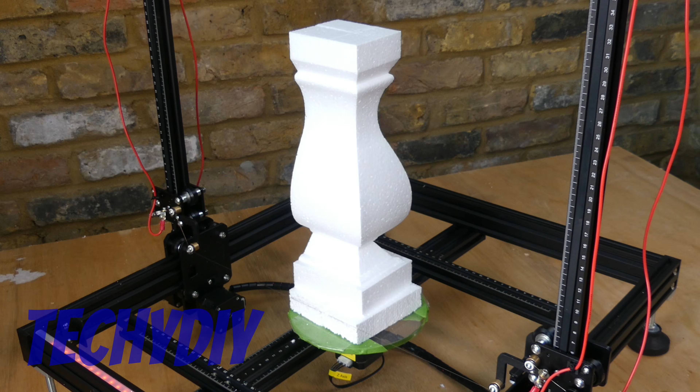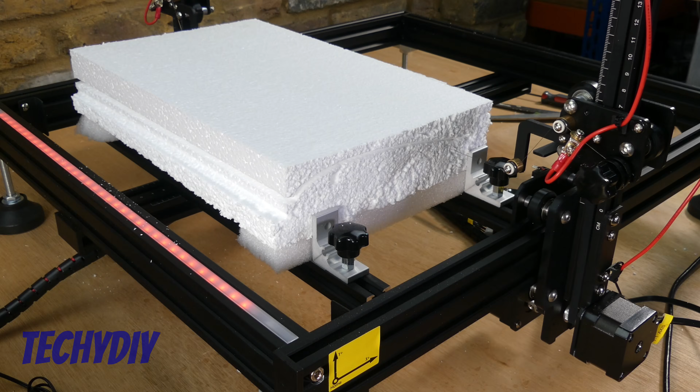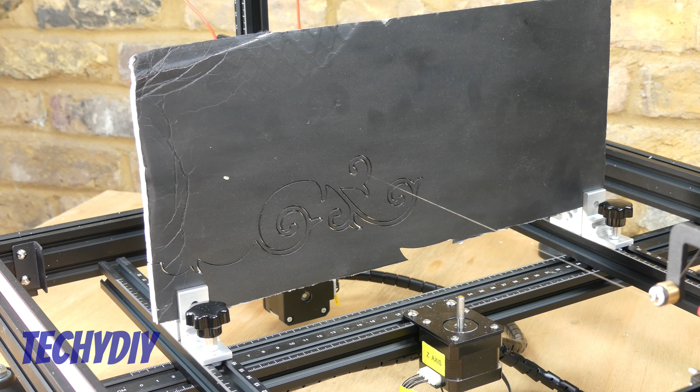In today's video I'm going to look at the FoxAlien HW40 hot wire foam cutting CNC machine. This uses a 0.25mm diameter nichrome wire to melt a path through the foam, heated by connecting it to a power supply. This is a GRBL based machine with 2 axes and a third rotary axis. It can cut different types of foam by setting the wire voltage and the axis speed.

This is what comes in the box. It's fairly easy to assemble, with full instructions provided in the user manual. First, the base profiles are screwed together.

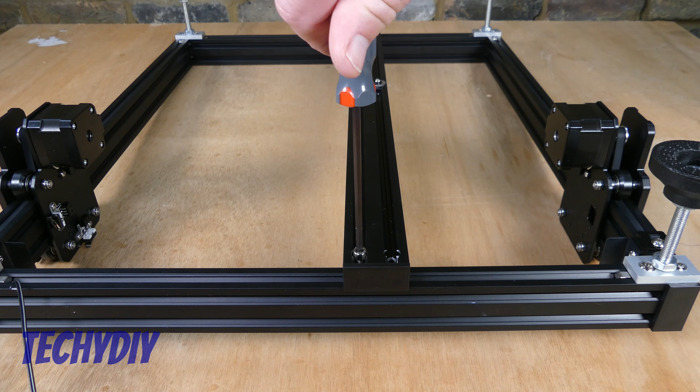The feet are screwed into the base frame. The rotary axis profile is attached to the base. Clamps are slid into the clamp profiles, and the clamp profiles are attached to the rotary axis profile. Next, the gantry sides are attached, followed by the gantry top.

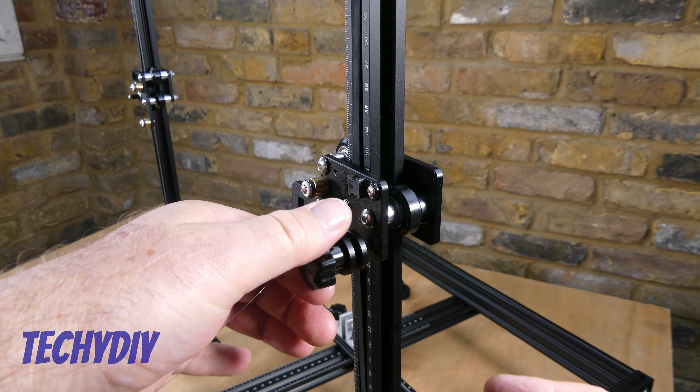Next, the nichrome wire is installed. The knob is used to tension the wire and expand the spring. The purpose of the spring is to compensate for the wire lengthening as it heats up.

Finally, the wiring loom is installed. The connectors are labelled for easy identification.

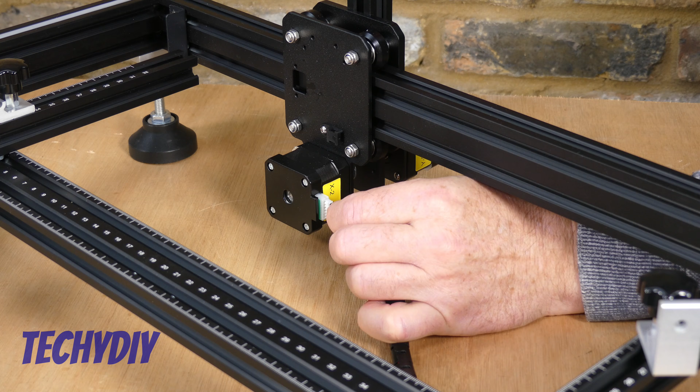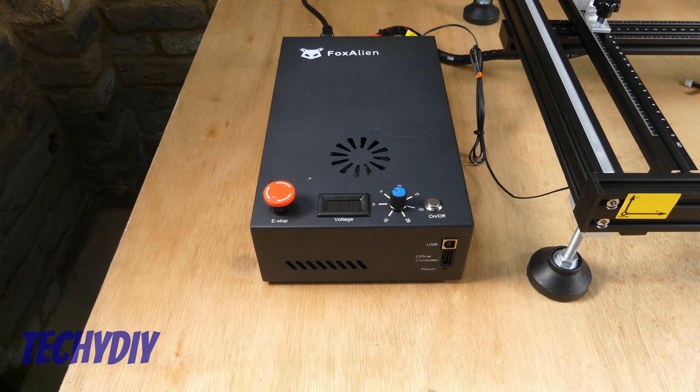Now the power lead is plugged in and the USB cable. Check that the emergency stop switch is released. The mains power is turned on, and then the switch is pressed to turn on the hot wire. Adjust the voltage to set the temperature.

Next, we're going to look at the software, but before we do that, a quick message from today's video sponsor.

The software, PDF and example files are provided on a USB memory stick. The USB COM port driver should be automatically installed by Windows. Inkscape is used to design and create G-code files, and UGS, or Universal G-code Sender, is used to send the G-code files to the machine. Both of these are free and can be downloaded directly from their respective websites.

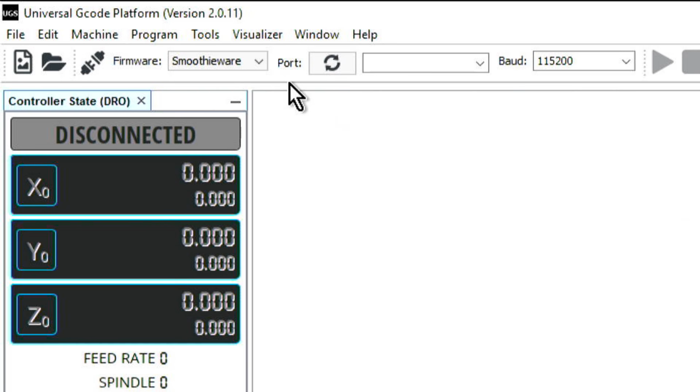UGS is copied onto the computer hard drive, and the UGS platform.exe or 64 file is run from the bin directory. Once it's loaded, the firmware is set to GRBL, the correct COM port selected, and the connect button pressed.

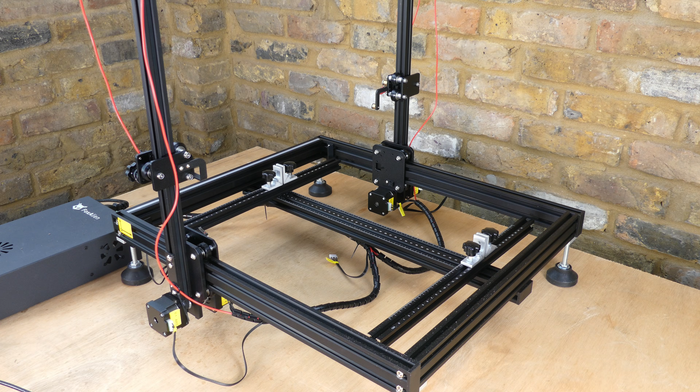The home machine button is selected, and if all is well, this should initiate the homing cycle to find the machine's 0 position. The user manual gives some good instructions about how to use Inkscape to create designs and turn them into G-code.

I'll quickly run through an example of importing an image. Shift-Control-D opens the Document Properties menu, where we can set the width and height to 400mm. Then in Edit, Preferences, Interface, uncheck Origin at upper left with Y-axis pointing down. Control-I to import an image.

Click the padlock to lock the aspect ratio, then we can change the width of the image. Shift-Alt-B is used to open Trace Bitmap. This traces the outline of the bitmap and turns it into a separate path.

Now we can delete the original image, set the position, and set the display mode to outline. The image trace created several separate paths. Some of these are not required, so they are deleted.

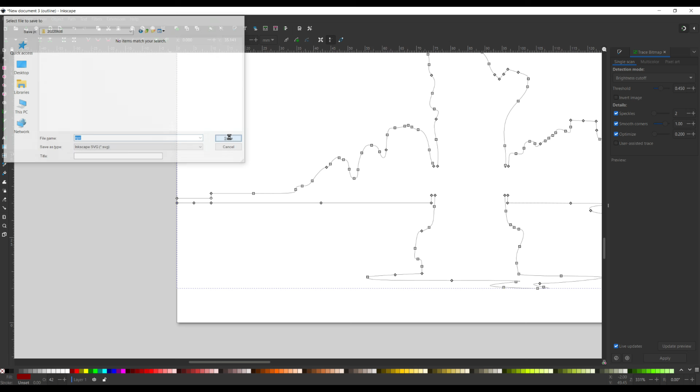Use Shift-Control-S to save the design as an SVG file. To cut the design on the Hotwire machine, we need to create a G-code file. From the Extensions menu, G-code Tools, Tool Library, select Cylinder, and Apply.

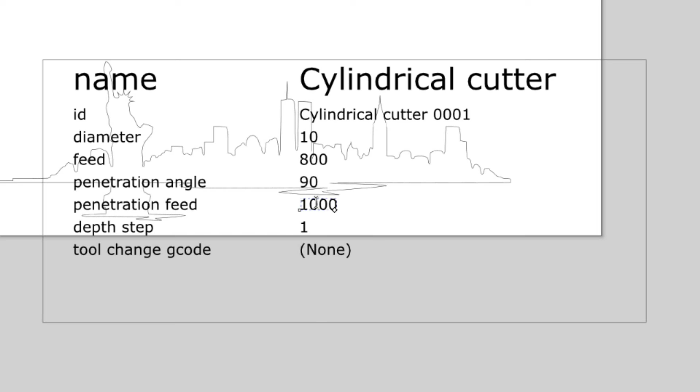Select the Text tool to modify the parameters, change the feed to 800, and the penetration feed to 1000. Select G-code Tools, Orientation Points, set the Z depth to -1, and then G-code Tools, Path to G-code.

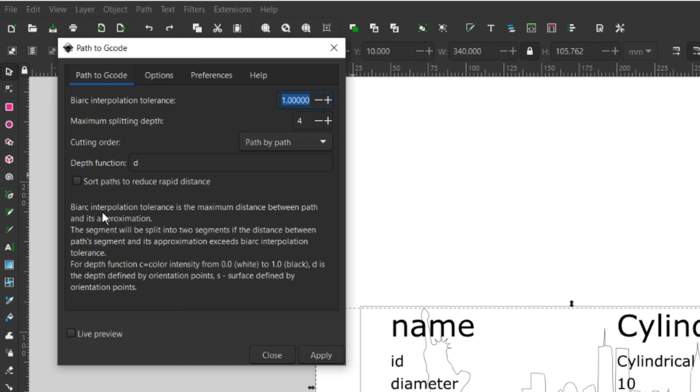Under the Preferences we can set the G-code file name and directory, and then under Path to G-code select Live Preview. Ignore the message and apply. If the path is covered with arrows, then it has worked and created the G-code file in the specified directory. Now that we have a G-code file, we can open it in UGS.

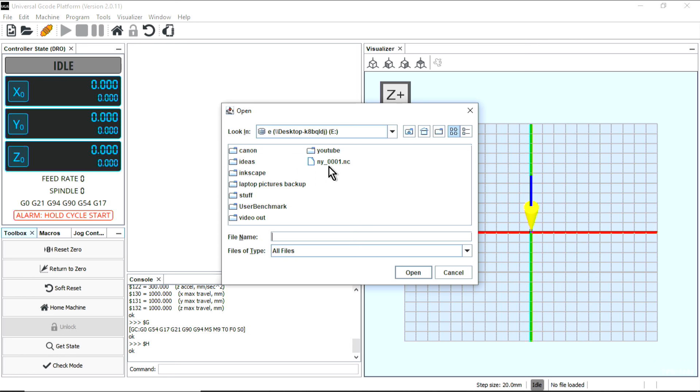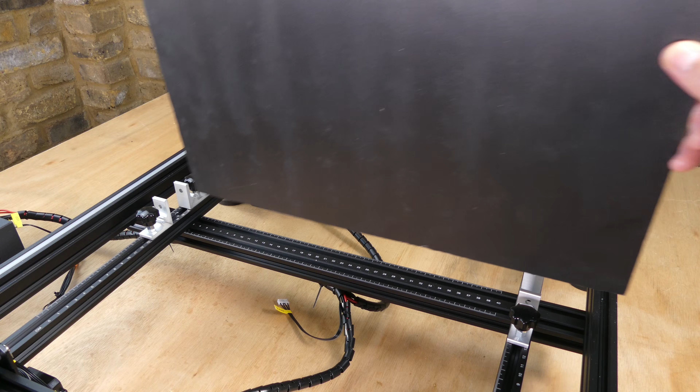Set the appropriate voltage for the foam material that we're going to cut. Clamp the foam in position. Reset the axes to 0. Turn on the hot wire. Send the G-code to the machine.

And when the job is complete, turn off the hot wire.

Next, I'm going to use Slicer for Fusion 360 to create a design from a 3D STL file. The software is no longer supported, but you can still download it.

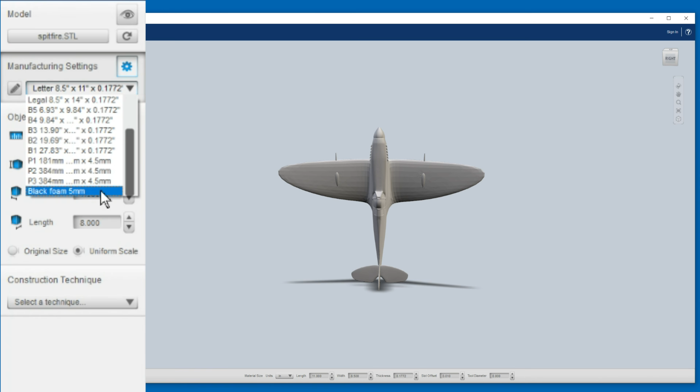First, the STL file is imported. Then the material is selected. The units and object size are selected, and then the construction technique. There are some really interesting options. I'm going to use interlocked slices.

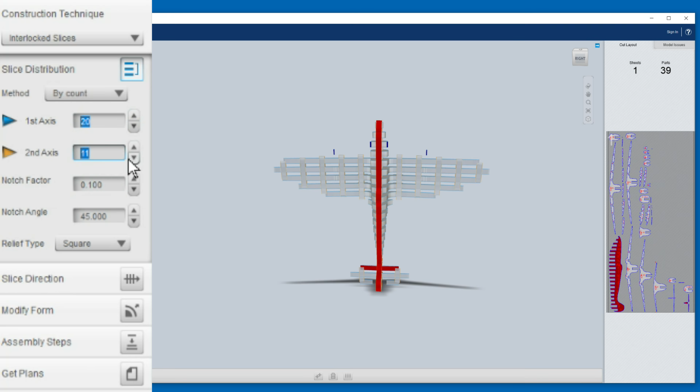The number of slices are increased to fill out the model. The cut layout is on the right. Red designates an error. To fix the error, Modify Form is selected, and the model thickened.

To save the cut layout, Get Plans is selected. The file type is set to DXF, and finally Export to My Computer.

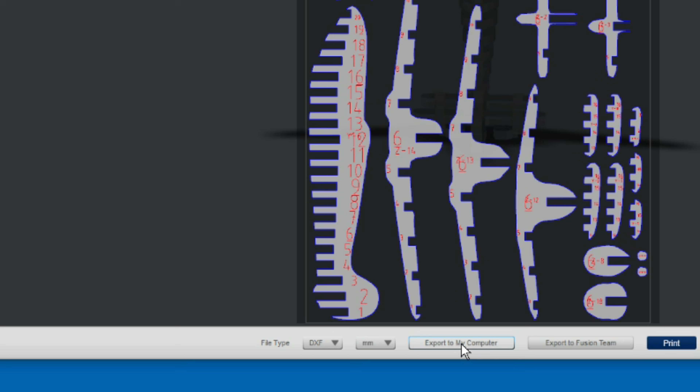Now we can import the file into Inkscape, delete the unwanted text, rearrange the parts and connect them together with rectangles so that we end up with one continuous path. The G-code file is created with the G-code tools and sent to the machine from UGS in the same way as before.

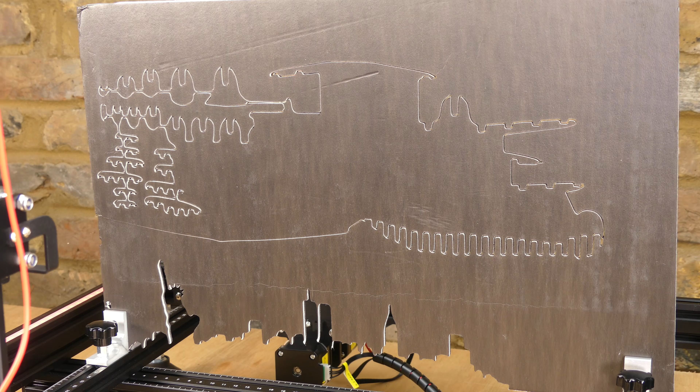Finally, the parts were separated and glued together with CA or superglue. Next, I used an online tool to create a model aircraft wing.

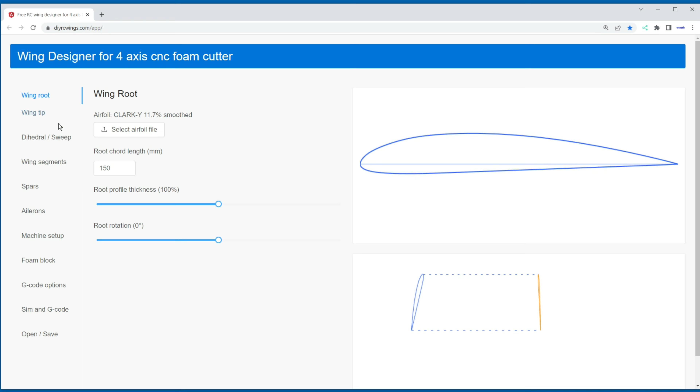The tool is designed for use with a 4-axis machine, but the HW40 is a 2-axis machine, which means the hot wire can only move horizontally, up and down, forwards and backwards. Because the HW40's controller doesn't recognise the 2 extra axes, we need to modify the machine setup by placing a semicolon in front of the U and V. This turns the commands into comments in the resulting G code.

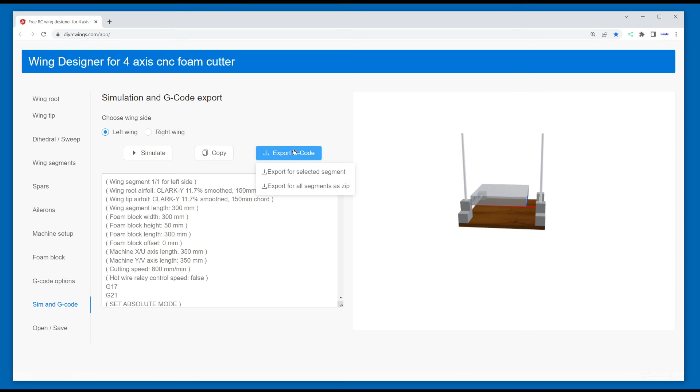There are lots of options, including adding spars and ailerons. Once the G code is saved, we need to make some modifications, manually commenting out the other commands that the HW40 controller doesn't recognise. Once that's done, we can use UGS to send the G code to the machine.

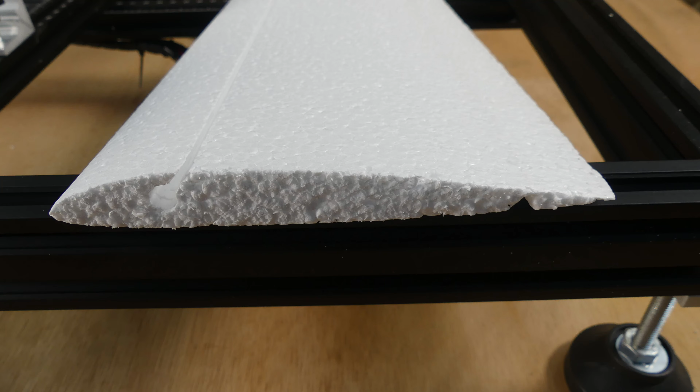Next, the rotary axis was installed, plugging in the Z-axis cable to the stepper motor and attaching the stepper motor to the frame. Then the platform is attached with 2 grub screws.

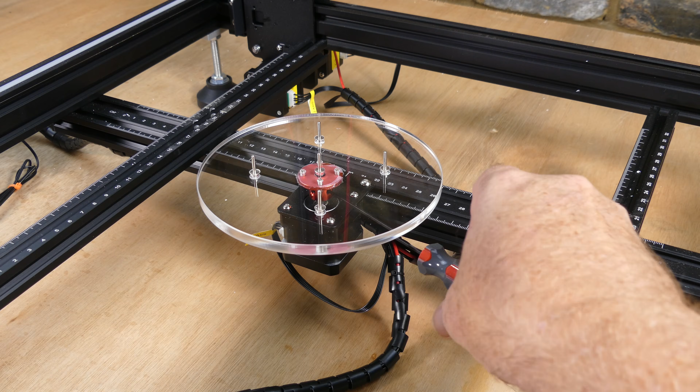The manual contains detailed instructions about how to create rotary G-code using Inkscape. Before we can create a design, we need to know that the Z-axis is the rotary axis, with 40mm equivalent to 360 degrees, and that X equals 200mm at the centre. So the first thing is to set a guideline for visual reference at X equals 200.

Then an image was imported from the USB memory stick. The width was changed to 130mm. A shape path was created with the Trace Bitmap tool, and then the original image deleted. The shape path was then centered on the guideline.

A rectangle was created, resized to be just larger than the shape, and centered on the guideline. The rectangle was converted from an object to a path. Both paths were selected, and the exclusion command used to cut the shape out from the rectangle.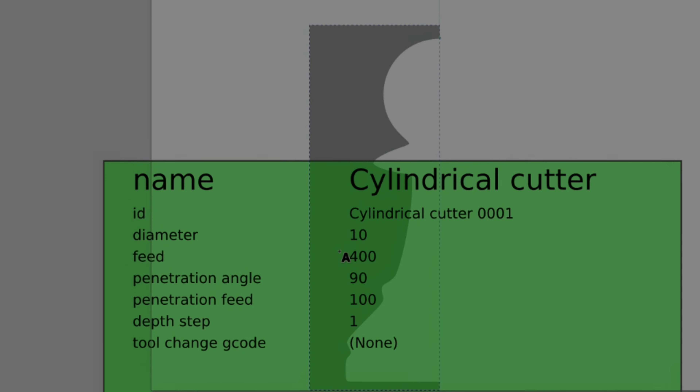Under the Extensions menu, G-code tools, Tools library, Cylindrical is selected. Then the text tool is selected to change the parameters, setting the feed rate to 800mm per minute and the penetration feed rate to 1000mm per minute.

The depth step is the number of millimeters that the rotary axis will move each time. Orientation points is selected. Z depth is the total distance that the rotary axis will move. With a value of 40mm, the axis will move through 360 degrees.

Then path to G-code. In Preferences, we can set the file name and path, and then under Path to G-code, select Live Preview, ignore the message, apply, and the G-code file will now be created in the specified directory.

A thick piece of stock was made from 50mm or 2-inch thick sections of polystyrene with a dab of hot glue at the centre of each. Although the platform has spikes, I also used double-sided tape to attach the polystyrene. The design and G-code was modified to help avoid the glue before being loaded into UGS and sent to the machine.

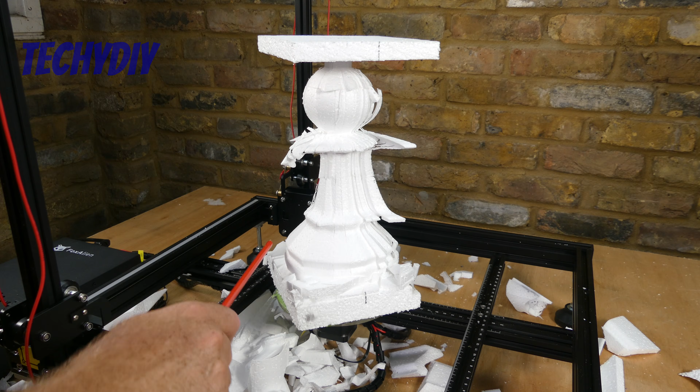I cut the top and bottom off by manually jogging the machine. And then I just rounded the top off the piece with sandpaper. If I'd used a thick enough piece of polystyrene, this would not have been necessary.

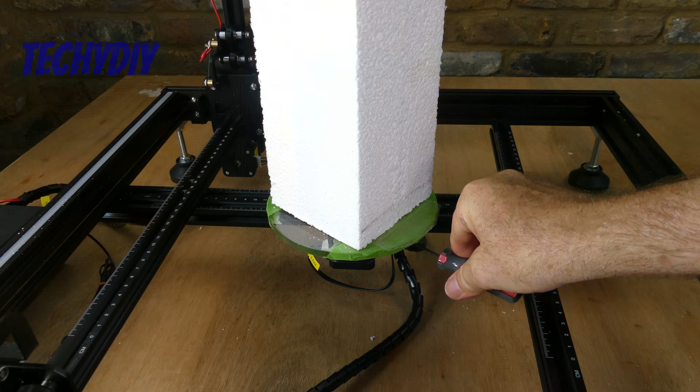For the next Rotary project, I imported an image of a baluster into Inkscape and converted the half profile into G-code. I applied some masking tape to the Rotary platform, followed by double-sided tape, and applied it to the back of the polystyrene. The Rotary platform was then attached to the stepper motor, the G-code loaded in UGS and sent to the machine.

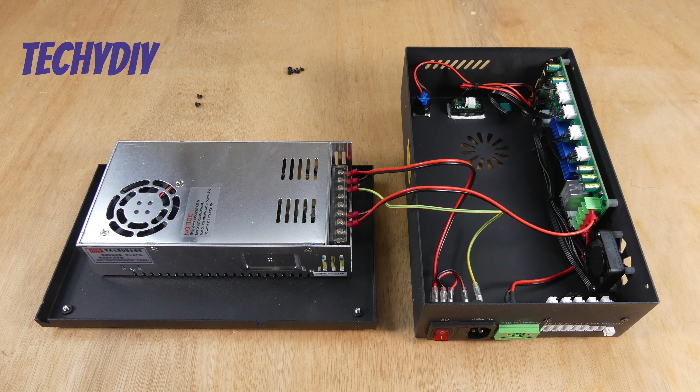Finally, let's have a quick look inside the control box. First, we have a 30V 8.3 amp DC output switch mode power supply. The control board runs Gerbil on a GD32F103, which is a 32-bit ARM Cortex M3 microcontroller.

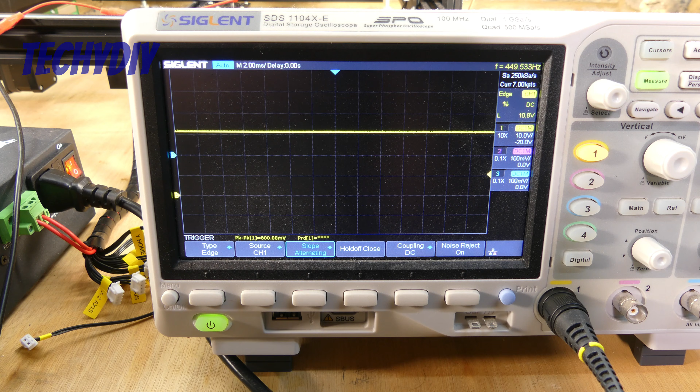The voltage output to the hot wire is approximately 30 volts, and it is pulse width modulated to control the wire temperature, probably using this 555 timer to generate the PWM signal, and some sort of MOSFET under the heatsink to switch the power.

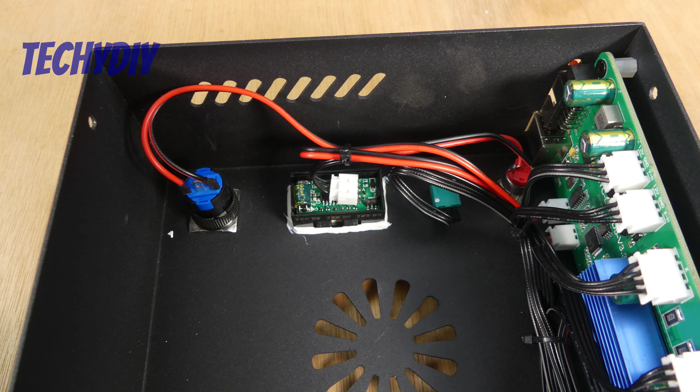Okay, so I think this machine would be useful for crafting, making props or patterns for casting. It can cut straight sections of model aircraft wing, but for shaped wings you would need a 4-axis machine. You can use most CAD and CAM software with it by using a Gerbil post processor. It acts in a similar way to a laser CNC machine, but where the laser doesn't turn off between toolpaths.